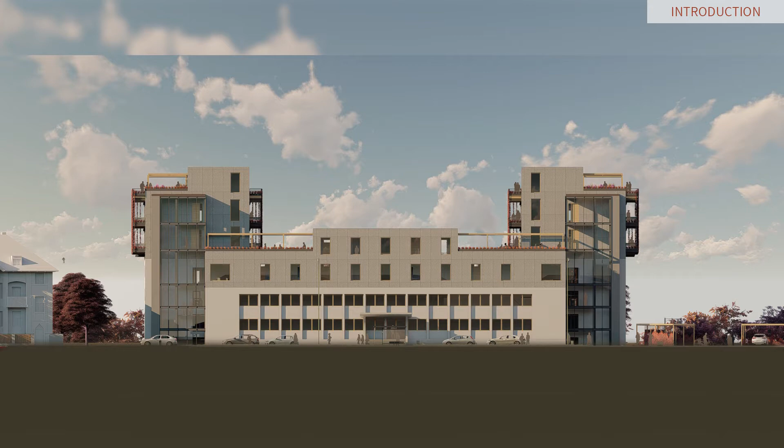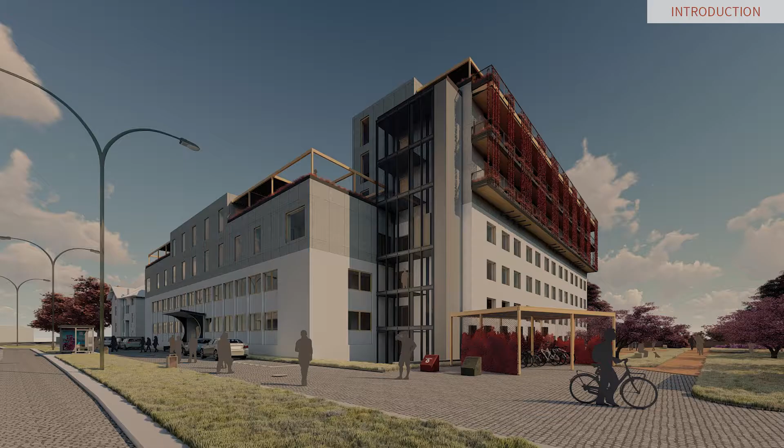Currently, the living standard of most dormitories is very low. We know it, we live there. The First Life project aims at creating an innovative renovation and addition of stories to the student dormitory for students, young families and seniors. And it also aims at creating an active and attractive neighborhood. As a site for our building, an existing dormitory complex na Větrníku has been chosen. But the idea is to use modular principles applicable when renovating other similar buildings.

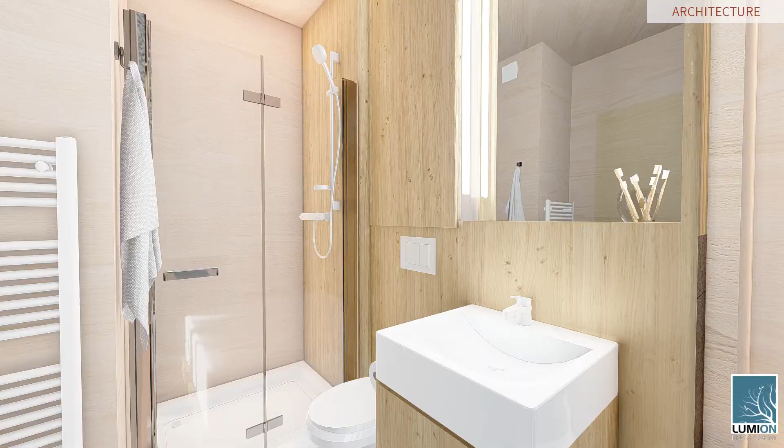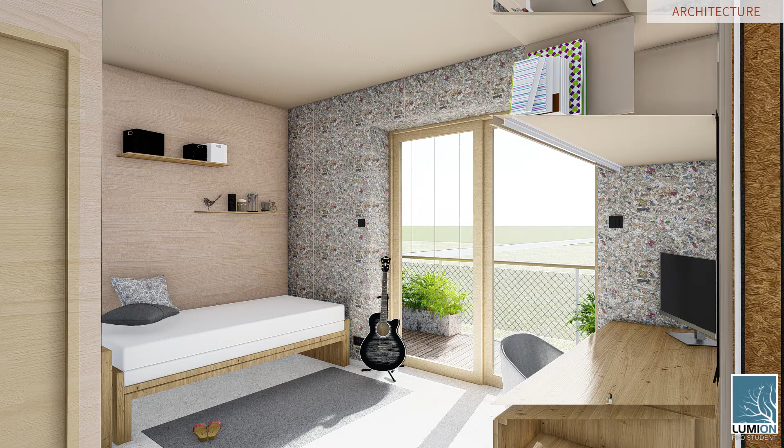First Life is not only one building. The project doesn't cover only the whole new living space, but also improves the quality and disposition of current rooms, sanitary facilities, and indoor common spaces for students. Our design is suitable for more than one age group. The accommodation can also be used for seniors or starting flats for students that graduated from the university. In the reconstruction, we wanted to offer multiple modular choices of disposition, which makes our design more affordable and usable.

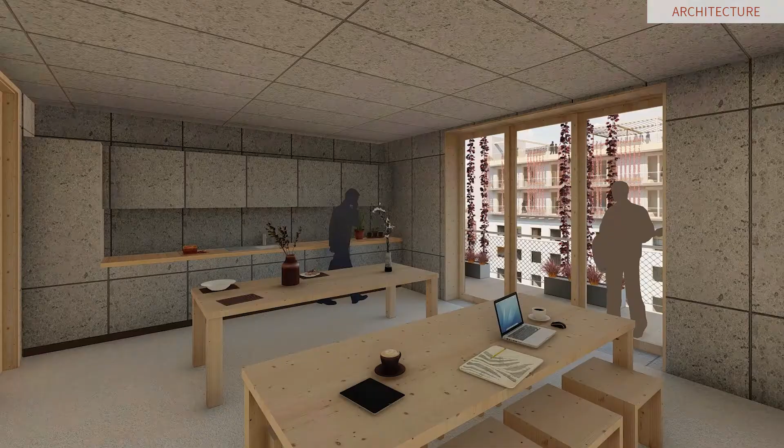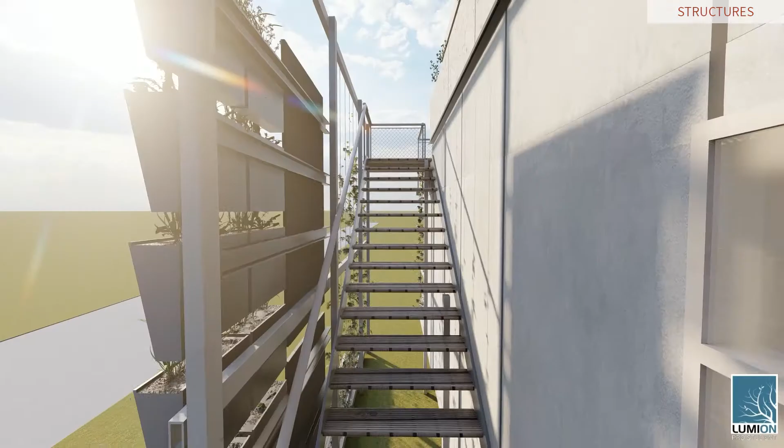By adding residential balconies, we extend living space. Balconies are shaded by climbing greenery, such as hop plants. The roof itself should provide a chance to meet and greet within the community. Most of the structure is made of wood. Only the outside additions, such as the staircase or the ramp, are made of steel. Both materials were chosen to be the most efficient for the particular case. Instead of one big beam, we have a set of frames which work together.

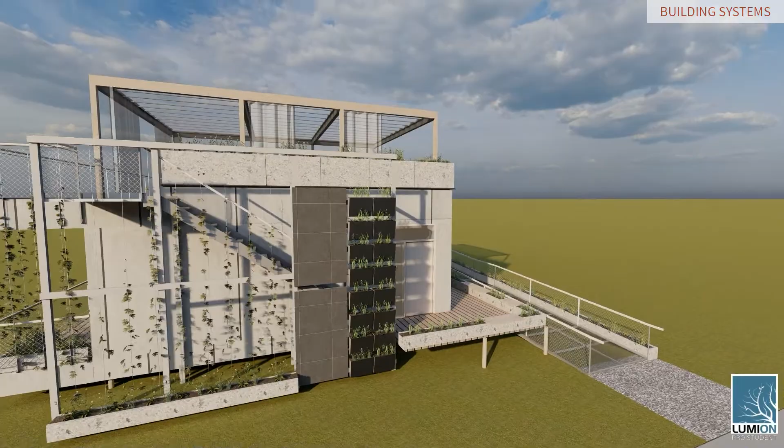The energy we use comes from renewable sources. Water heating is provided by a heat pump, which also supplies heat to the underfloor heating system. The energy is stored in two separate thermal storage tanks. Wastewater is treated in a vertical root filter on the facade and then reused. To ensure indoor air quality, we use ventilation with heat recovery.

A lamella photovoltaic system on a roof pergola generates electricity which is stored in batteries and water thermal storage tanks. All technology is controlled by a central system that is able to communicate with the electricity distribution network. It reacts by changing its own consumption or supplying energy to the distribution network.

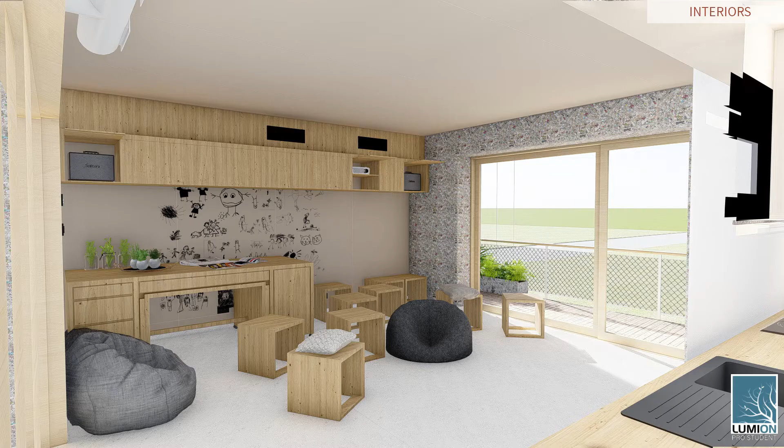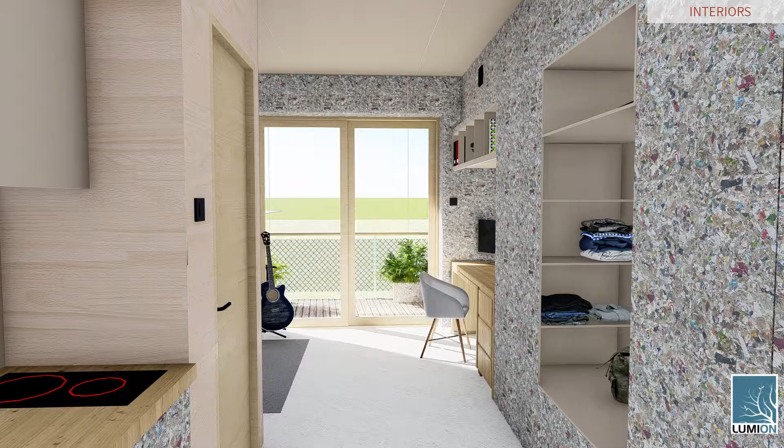A big part of our design is tailored furniture, movable and multi-purpose. In the community room there are more combinations of using chair boxes and the kitchen island. Utilize it as a kitchen unit, dining table and also a space for home cinema. In the student bedroom we designed variable furniture, like for example a folding table and also a bed which can be double size.

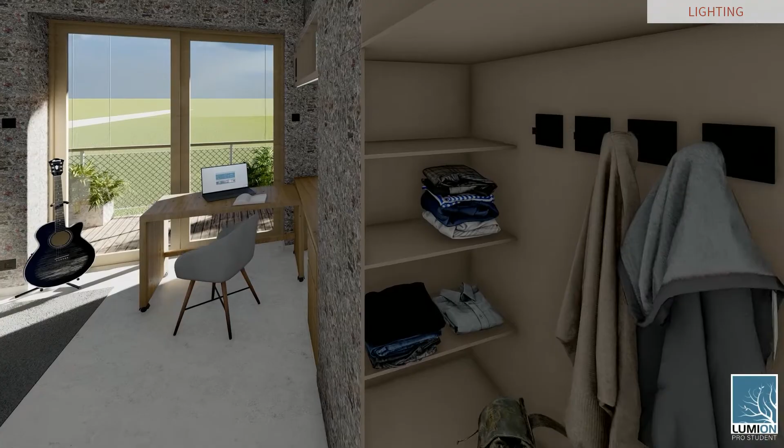All rooms in the demonstration unit use as much daylight as possible during the day. As a prevention of overheating, we designed a roof overhang and external blinds outdoors. As an additional light source, we designed biodynamic lighting.

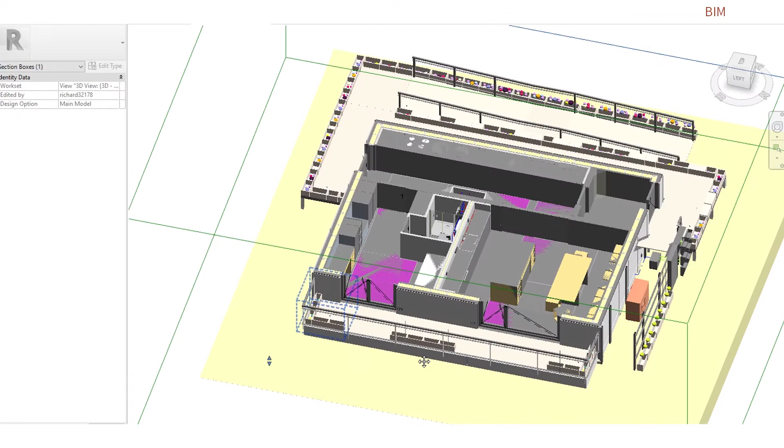Building information modeling is currently an integral part of every modern building design. On the First Life project, models were used from the first sketch. Models contain structural, architectural and MEP parts, and they were used for daylight, thermal, environmental and solar analysis.

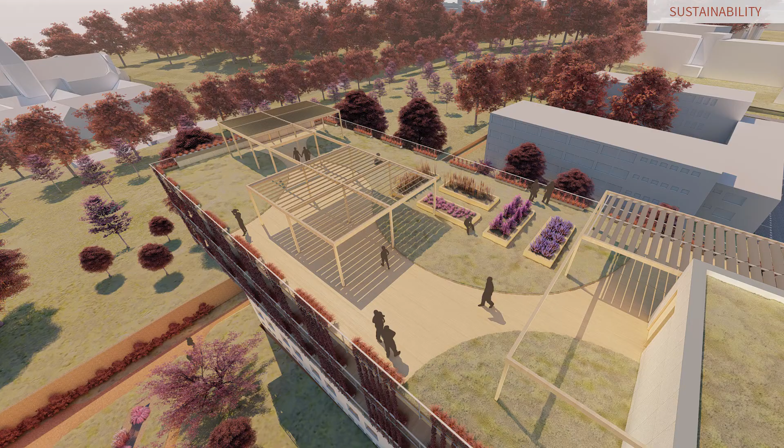The project focused on economical, social and environmental aspects. These three pillars of sustainability are balanced through the whole project. For example, CO2 emissions are calculated thanks to life cycle assessment. Green roofs and an insect hotel are helping in minimizing the heat island effect and at the same time enhance biodiversity on site. Housing affordability and energy metering are good points for economic sustainability that is also supported by the optimization of products' durability and their reuse.

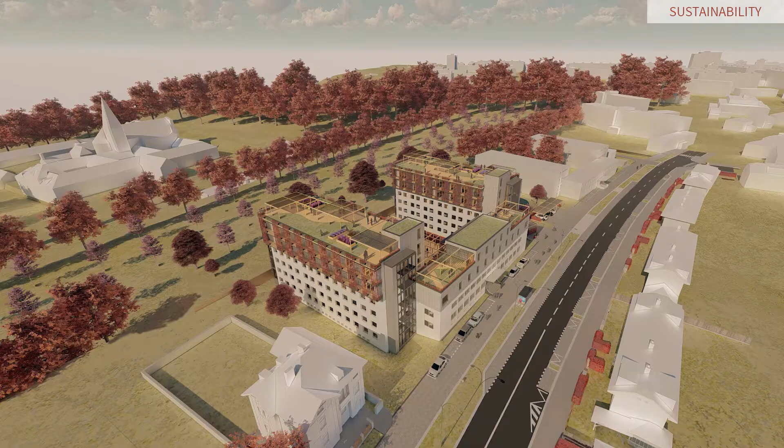Retrofitting of an existing dormitory allows increasing the social sustainability with the flexible areas and also accessible exterior spaces not only for students and building users but also for local inhabitants.

And that was just a sneak peek. The project is not just a building, it became our lifestyle, our first lifestyle. See you in Wuppertal.